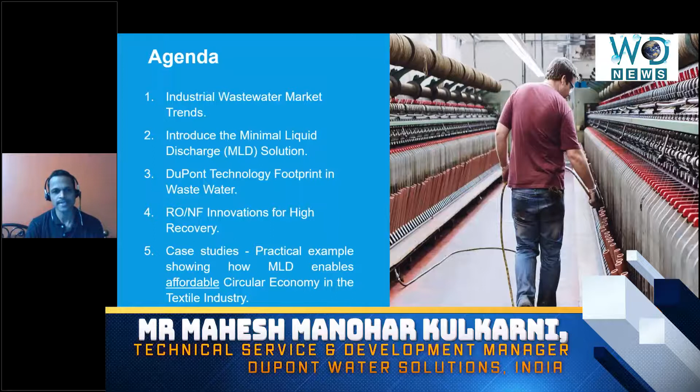Also, we'll try and sort of catch up with some of the practical examples, some of the live examples which the textile industry especially is throwing up, wherein they are achieving the goal of not only minimal liquid discharge, but zero liquid discharge. And this is what we call as a circular economy.

A circular economy wherein we are trying to maximize the recovery of wastewater. We are trying to basically reduce the volume which is going to the evaporation process, wherein we are trying to recover the brine or the salt which could be used for the manufacturing processes.

Overall, this is what we call as a circular economy. It is giving back to the user or to the manufacturer what he is using in the manufacturing process. I move to the next slide.

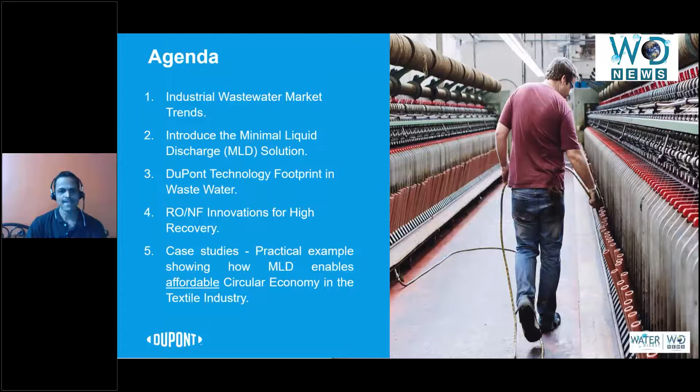As we all know, in the past there used to be an abundance of freshwater resources available to humanity and to industrial consumers, whether with respect to groundwater, surface water, river water, or now sea water. However, as we have grown, these freshwater resources are becoming scarce day by day. On the other hand, our municipal corporations and common effluent treatment plant systems have fixed capacities. They take in the wastewater or effluent which industry produces and try to treat it, but this capacity is fixed.

With the growing trend of industrialization and growing manufacturing resources, there is a lot of burden on the industrial customer from both ends. On one end, his raw water resource is getting scarce, and on the other hand, he cannot discharge a particular volume of water to common effluent treatment plants or municipal corporations because the infrastructure is limited or constrained. Hence there is a tight burden on the industrial customer to look at both the equilibrium of taking in freshwater and discharging water outside his premises. That's where the concept of recovery of water used in manufacturing or production processes, or any application the industry is engaged with, becomes important.

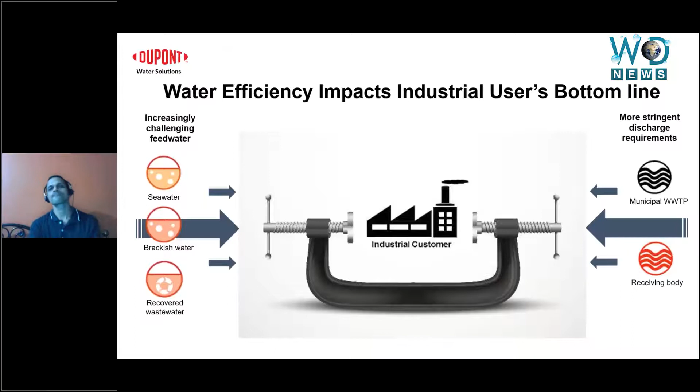However, with the growing scarcity of groundwater and surface water, the impact of wastewater reuse is gaining momentum day by day. When we talk about wastewater reuse, the total dissolved solids and salt concentration increase further, and the amount of impurities, which we call foulants, also increase. There's obviously a question: if you further try to maximize water recovery, these impurities are going to grow. And that's correct. When we talk about maximizing water recovery, especially water consumed by industry in their manufacturing process, it gets concentrated. Hence whether it's salt concentration or organic foulant concentration, it's further going to enhance.

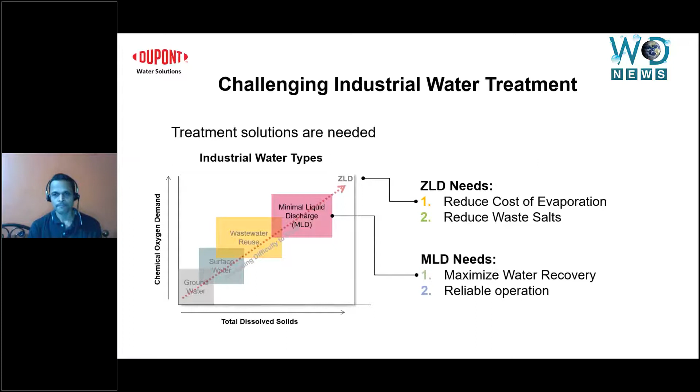In the past, if we have seen some of the customers who would have preferred to go with minimal liquid discharge or zero liquid discharge applications, primarily targeting a water reuse facility, shown in yellow, we've seen a recovery of up to 75%. Recovery is the amount of water recovered from the available wastewater, and the balance is either fit to discharge or put directly to thermal processes, like mechanical vapor recompression or MVR, or MEE evaporators. So the process was to recover say 60 to 70% of the wastewater, with the balance 30 to 35% put to the evaporation or thermal processes.

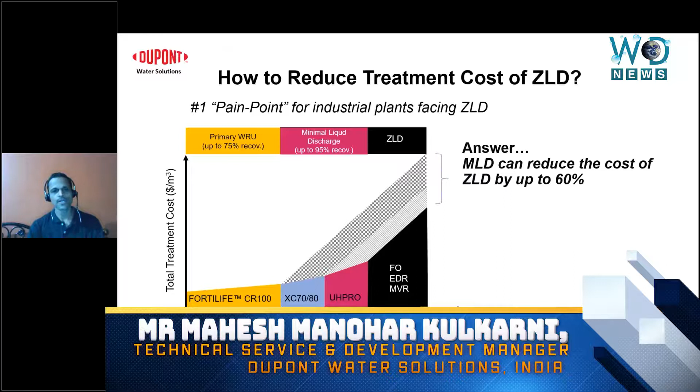However, the thermal process is very capital intensive. That's where we understood that if we offer reverse osmosis technology to our customers, so they could recover further water, from say 60 or 75% up to almost 95%, wouldn't that be a practical solution to reduce the zero liquid discharge cost? Ultimately customers look at the overall cost applied, whether for zero liquid discharge or minimal liquid discharge.

When we compare the cost involved between ZLD and MLD, we see that if customers employ reverse osmosis based solutions and recover more water, the ZLD cost graph could be brought down, and the total cost could be reduced by up to 60%.

The audience might wonder, looking at the x-axis, that it shows the salinity in the water growing. As a water professional, we know that as we try to maximize water recovery, the concentrations of ionic impurities in the water grow, what we call salinity. As salinity grows, it becomes tougher for technologies to handle. But DuPont is proud to have brought in conventional spiral wound membranes which can sustain that and further maximize the recovery.

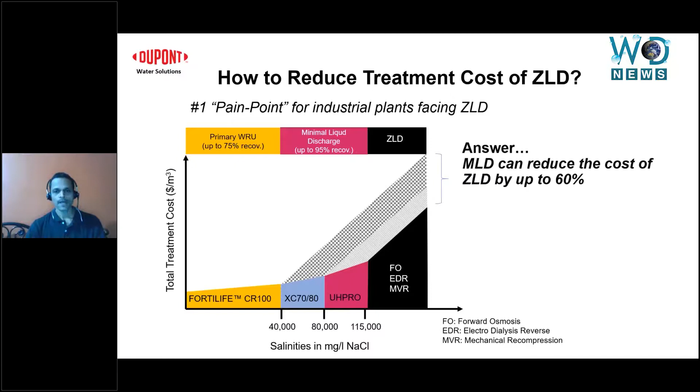This is a very interesting slide because, historically, there were very few places where minimal liquid discharge was implemented. As I shared, the method was to recover as much water as possible, around 60% to 70%, with the balance treated with thermal processes. Most customers ask us, isn't it cumbersome that using an RO system creates complications, since we're using different technologies to treat the wastewater or maximize water recovery?

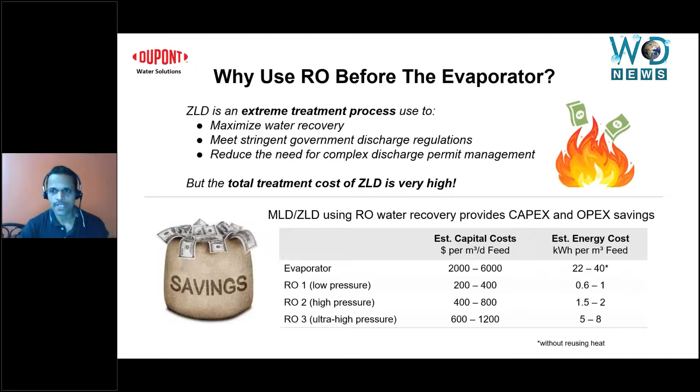As in the earlier slide, we have seen the benefit of including RO as an important technology in a ZLD process, apart from reducing the water going to the evaporation process, recovering maximum water with conventional technology, because handling reverse osmosis systems is pretty much now hands-on with several customers.

Apart from that, there is also a spiral wound technology called ion separation technology, or conventionally nanofiltration technology, which has been used to primarily separate the monovalent ions and the divalent ions. Taking the clue from textile wastewaters, in their dyeing process, they use sodium chloride as a dyeing salt or sodium sulfate as a dyeing salt.

And definitely when they have the effluent coming out after the manufacturing process, these salts are present in the effluent.

Apart from recovering the wastewater or trying to maximize its recovery, Dupont also thought: why not have a solution where we could recover the salts, which can reduce the burden on the evaporation process and also help the manufacturer get the brine solution or the salt back for the dyeing process. Hence, a membrane technology which can separate salts has become quite popular recently, and that's where we're coming to the point of circular economy.

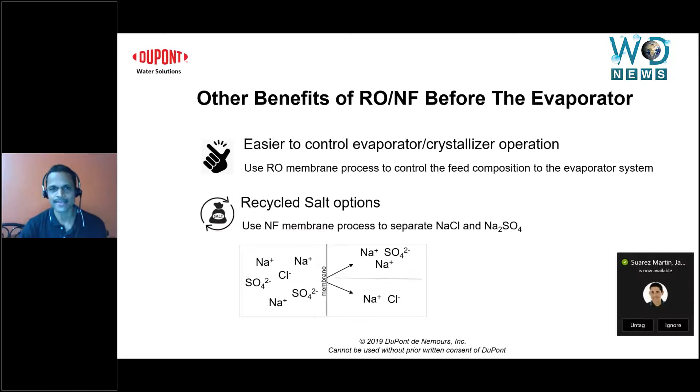This gives you an indication that as you maximize water recovery, the reject concentration grows. So when you move the needle from say 80% to 90% or beyond, you end up with a high salinity on the reject side. This is definitely a challenge.

If you look at the graph on the right side, it shows the salinity level or concentration on the x-axis and the osmotic pressure, or the driving force required to treat that water, on the y-axis, noted in terms of PSI. As the total dissolved solids or concentration on the x-axis grow, the osmotic pressure requirement also grows, which means that when we try to maximize recovery, the concentration on the reject side grows, the TDS grows, and as TDS grows, the requirement of driving pressure, or osmotic pressure, also grows.

And this gave us an input as to what kind of innovation a technology partner can bring in. Let's move towards the next slide.

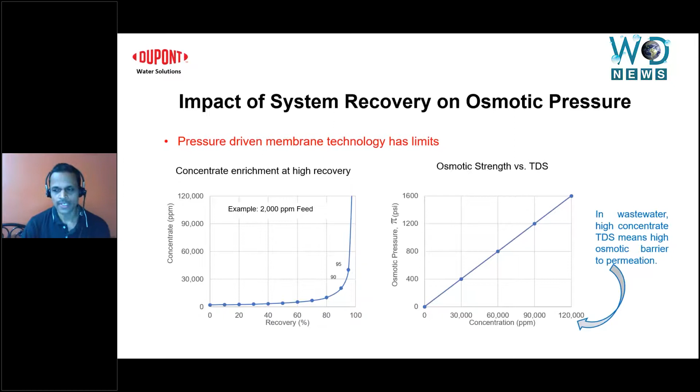We looked at water recovery. We looked at salt composition or salt concentration. Now let's look at the other parameter which is also very critical when it comes to challenging waters.

This is called COD, chemical oxygen demand. Especially when we talk about wastewaters, the concentration of COD is pretty substantial. Even though technologies in the pre-treatment could reduce the COD, still at the inlet of the RO element, we find the concentration and presence of COD.

Over here, there are two different charts denoting two different values of inlet COD to the RO elements. On the left side, we have tagged it as 60 ppm of COD. As we maximize the recovery, if you reach a point of 90% recovery, the concentration of COD moves from 60 to almost 600, which is 10 times, because we are trying to increase the recovery by 90%.

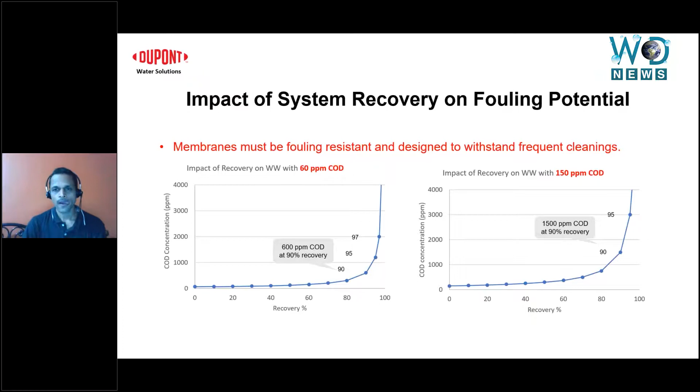This is again an avenue which we thought has to be taken as a point of consideration if we are in the zone where we want to move towards minimal liquid discharge or zero liquid discharge. Move towards the next slide.

So we talked about salt concentration, we talked about COD. Now, from the user perspective, let's talk about the salt which he uses in the manufacturing process. Imagine the amount of salt waste which is being created if the user is being forced to implement zero liquid discharge. Over here again, there are two charts, one on the left side, one on the right side.

If you look, the amount of trucks required to dispose of the salts is around 1.25, which is like 1 plus 1 and 1/4. This salt primarily has been taken to the landfill, or it's been pretty much disposed of.

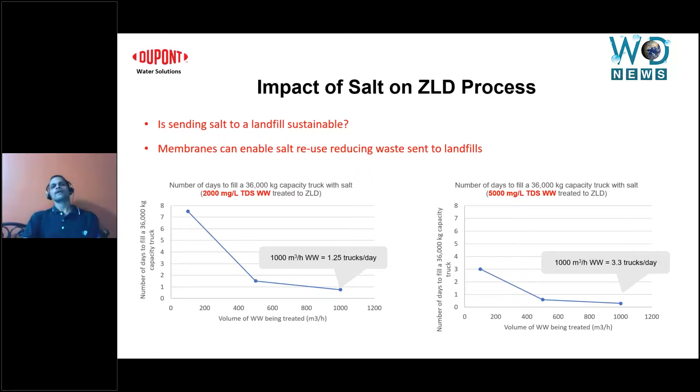The next slide primarily talks about the kind of portfolio what Dupont brings in. As we said, implementing a minimal liquid discharge or a zero liquid discharge is a composition of various technologies, a combination of various technologies, whether it could be spiral wound reverse osmosis or nanofiltration membranes.

It could be a use of ion exchange resins, which is primarily used for softening or COD reduction, like an organic scavenging process. Ultrafiltration processes, which are hollow fiber UF membranes, could be used to reduce the particulate matter, to eliminate the suspended impurities which could have an impact on the downstream equipments. It could be the membrane bioreactors,

which could aid the biological process. It could be the MABR, which is the membrane aerated biofilm reactors, which further enhances the oxygen transfer and helps the biological systems. It could be the closed circuit RO systems where we try to maximize the recovery and reduce the waste by implementing processes which will reduce the volume being wasted.

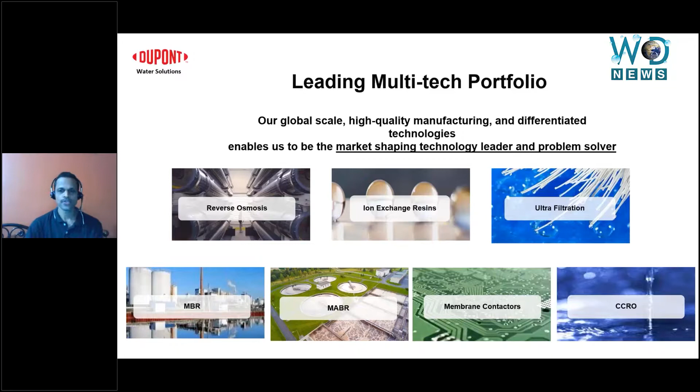We move towards the next slide, which talks about these various technologies in a little bit detail.

This slide talks about the various applications of the technology. As we understand, trying to solve a particular challenge or meet a customer need is not something a single technology can do. Every technology has its own advantages and its own shortcomings which have to be overcome. Hence, DuPont Water Solutions brings all these technologies in front of the customer to suggest the optimized solution.

When a customer thinks about treating wastewaters or any challenging waters, it could be RO systems, wherein we use desalination processes to maximize recovery. It could be ion exchange resin process, where DuPont has been a market leader and technology leader. It could be ultrafiltration processes, the hollow fiber UF membranes now available in two different chemistries.

It could be polyether sulfone based chemistry, or it could be PVDF chemistry. These are pressurized UF systems. There is also a possibility of suggesting a submerged UF system.

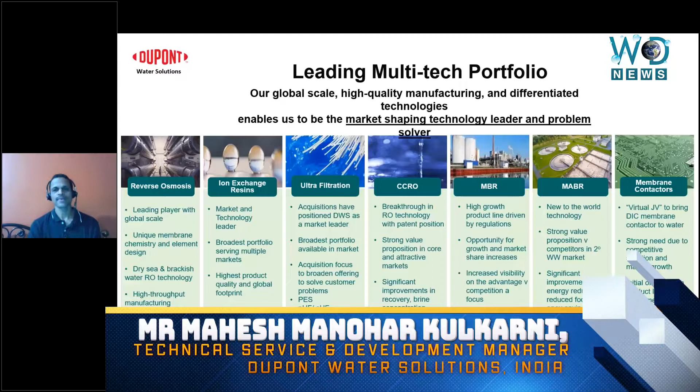MABR is something very interesting coming up and catching attention. These are again hollow fiber membranes immersed into the biological systems. This process is very OPEX saving intensive, reducing energy consumption compared to normal bubble type diffuser processes. There's significant energy saving.

There is significant footprint saving as well, especially when implementing biological systems for metropolitan cities like Mumbai, Delhi, Chennai, Bangalore, or Calcutta. The footprint savings are pretty huge, and this is another technology which DuPont brings to the forefront for the customer.

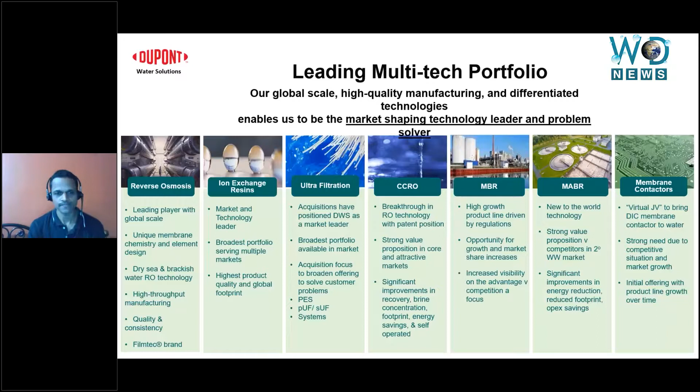Move towards the next slide.

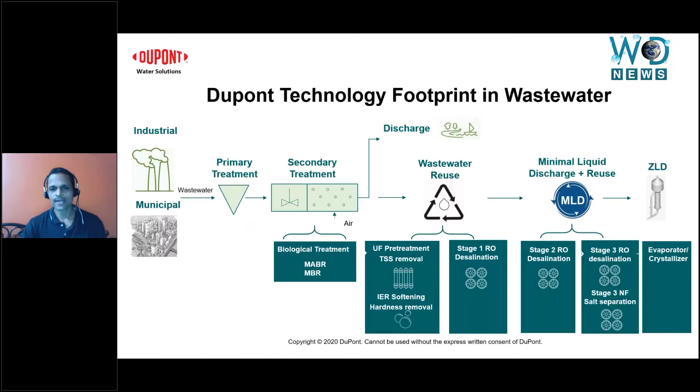We go into a little bit more detail in the subsequent slide.

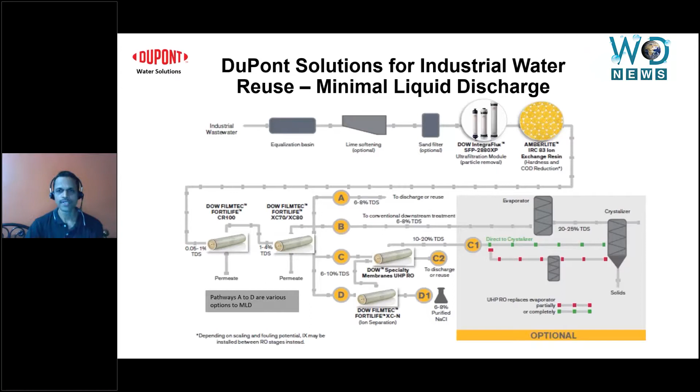As we have seen the challenges when it comes to wastewaters or challenging waters, the amount of total dissolved solid grows, the amount of foulant grows, the amount of impurities which needs to be treated with the spiral wound membranes grows. That definitely is an avenue where a technology provider like DuPont can give you technologies which not only can sustain this, but actually can enhance your overall wastewater treatment processes.

So when you look at the right side of your slide, you will see that when it comes to the tertiary treatment, we have the conventional ultrafiltration system, followed by the ion exchange resin-based system in order to remove the scale potential agents like calcium salts. What follows is basically stages of RO system. Stage 1, which is primarily brackish water, stage 2, which is primarily seawater, and stage 3, which could be a combination of seawater or an ultra high pressure reverse osmosis system.

There comes a sort of innovation wherein DuPont has developed the FortiLife series of products, which offer several benefits. On one hand, we know the challenge that when a customer talks to us about maximizing the recovery, the most important fact to remember is not only reliability or sustainability, but are the membranes more fouling resistant in nature? Are the membranes capable enough to handle the foulants in a better manner?

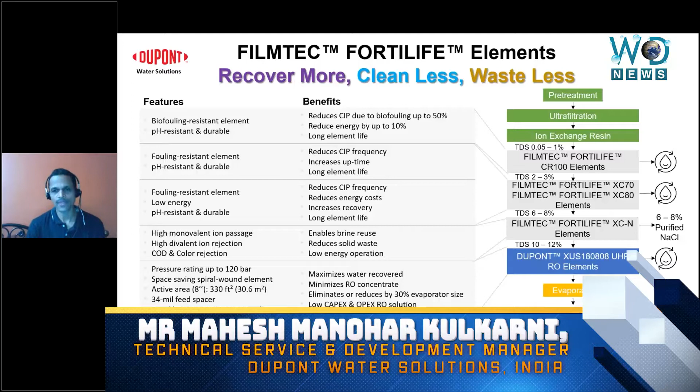which the membranes have to deliver. If the membranes are not able to deliver higher productivity time, sometimes technology doesn't find its place. Hence, it becomes very, very crucial for a technology provider. And that's where DuPont Water Solutions comes into the foreplay with the partnership of the customers. At the end of the day, when the solutions are brought in, it should help the customer, isn't it?

So looking at whatever the needs of the customer are, and looking at how we can convert those needs into the products which the customers can have and can help, is something which DuPont has been continuously working on. And this has been possible only with the continuous engagement with the customers. We also feel that this is a platform where we can get continuously engaged, if not on a face-to-face basis, but having a virtual kind of engagement does help us.

So whether it is with respect to the various solutions, this is something which we try and sort of implement and help the customers to achieve the goal of minimal liquid discharge or zero liquid discharge. We move towards the next slide.

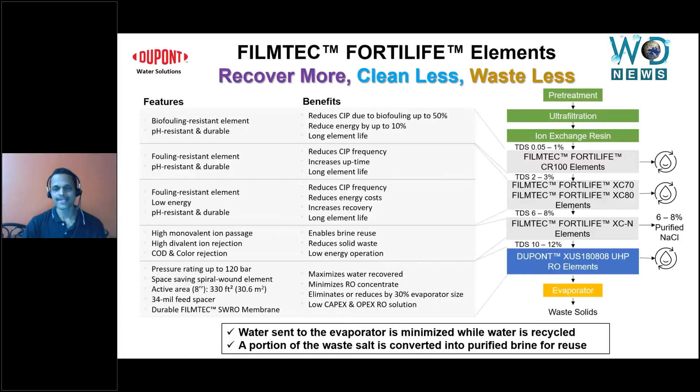As we said in the beginning, we need to have some practical examples wherein these technologies, which can help deliver circular economy, have been put to use.

Especially when you talk to textile industries, they have been pretty much water intensive, and those industries have also been pushed by government regulations to implement zero liquid discharge. So whenever there is an engagement with a textile customer, there are a lot of challenges which they express, and that's the point where we help them achieve the goals, not only from the specific aims of the industry, but also from the point of view of sustainability, where we could maximize water recovery, give less water to the evaporation process, and try to recover salts which could be used in the manufacturing process.

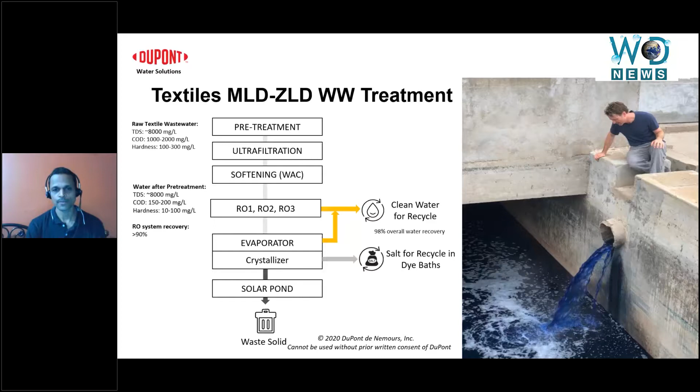This is where we try to conserve the natural resources available, whether it's maximizing the water that's been allowed to discharge or go to waste. We're trying to bring back the salt which can be used for the manufacturing process, and definitely there is an aim to conserve energy and spend less. The technologies have to take this viewpoint that when it comes to applications, energy consumption is kept at an optimized level in order to deliver the output.

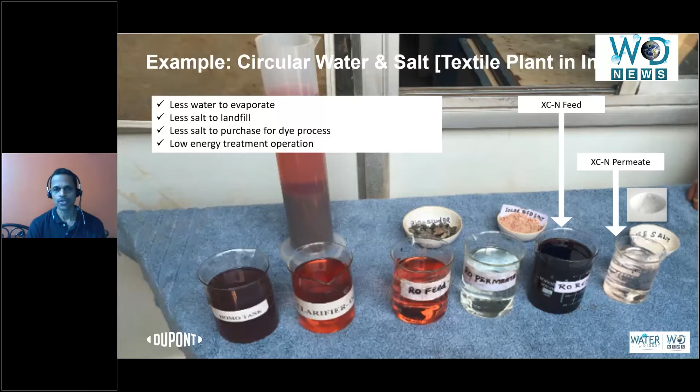These are some of the examples which we have taken from the industry, and we have the last couple of slides coming up which talk about some numbers.

As we said before, implementing a minimal liquid discharge vis-a-vis implementing a zero liquid discharge, primarily a wastewater reuse facility, can reduce the overall cost by 60%. Here is a live example where we're trying to maximize recovery up to almost 95%, instead of putting a large volume of water to the thermal processes, or putting the volume directly without minimal liquid discharge into the zero liquid discharge processes. What are the savings the customer gets?

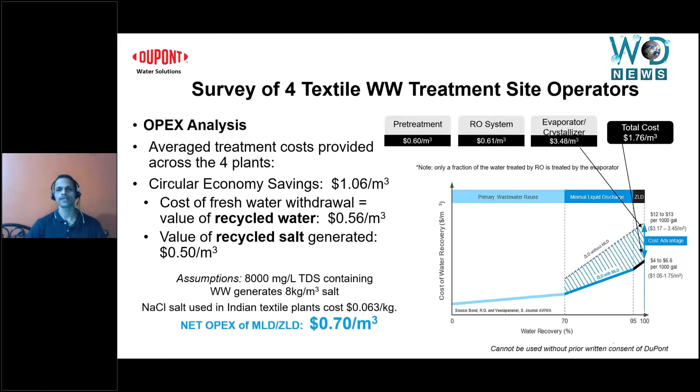So overall, if you put these two buckets together, the recycled water available as fresh water for the manufacturing process, plus the purified brine solution if recovered, it adds up to more than $1 per cubic meter. And combining the pre-treatment costs and the RO system cost, you will see a substantial saving if we combine the processes of minimal liquid discharge along with zero liquid discharge, rather than implementing only zero liquid discharge.

We move towards the penultimate slide, which again brings these three different philosophies together.

So we have three buckets over here. One is the water which has been fit to discharge or is allowed to discharge. The second bucket, shown in the middle, is implementing a technology which complements ZLD, a combination of minimal liquid discharge and zero liquid discharge. And the last is purely implementing thermal processes and zero liquid discharge.

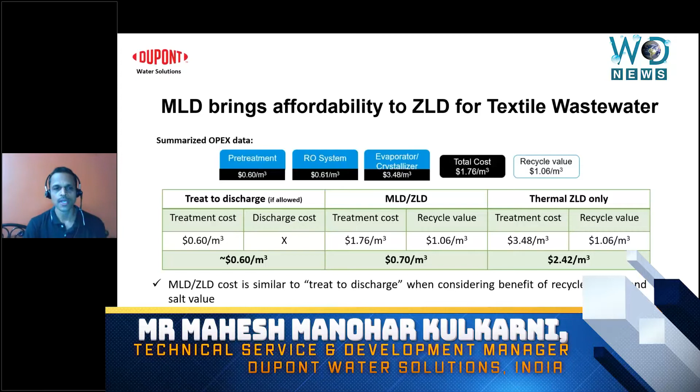As we saw in the earlier slide, if you're allowing the water to be fit for discharge, the cost is around $0.6 per cubic meter. When using the MLD solution, after deducting the savings, the treatment cost is around $0.7 per cubic meter. And if you deduct the savings in the thermal processes, the overall cost per cubic meter is around $2.4.

So if you look at these numbers, it's very interesting. This always opens up avenues where, rather than allowing the water to be discharged after primary or secondary treatment, we should look at technologies that help recover the water to a large extent with minimal OPEX, a difference of only $0.1 per cubic meter. These savings could be further enhanced by using technologies like the FORTILIFE series of RO and NF elements.